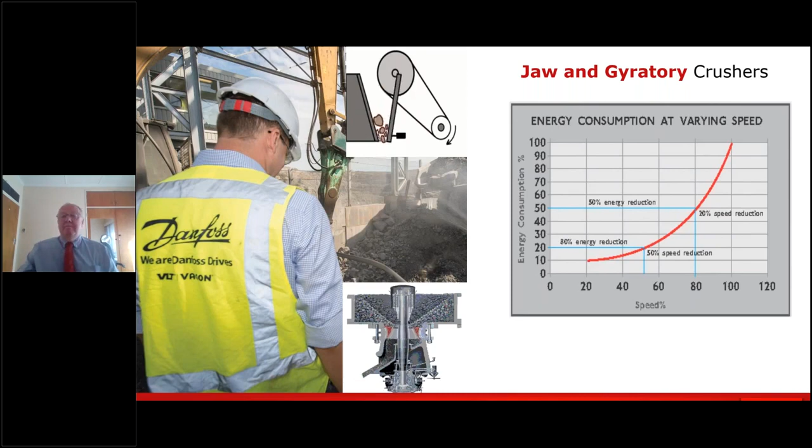Now, quite often when I'm in discussions regarding variable speed drives, I often get the comment, a drive is a drive. In other words, they are saying, well, all drives are the same. Well, that's actually not true, because the high efficiency and the resulting low power loss actually minimizes the heat load on the switch room's air conditioning and its ongoing operating costs.

So simply comparing stated efficiency ratings of variable speed drives from different manufacturers can actually be misleading, because they will all typically state that they're in the 96 to 98% range. But the factors included in those ratings can be different from one manufacturer to another.

So, for example, the Danfoss drive incorporates what we call a built-in DC link choke harmonic filter and RFI filter. And it can be installed with at least 150 meters of screened motor cable between the drive and the actual motor as a standard. And any losses in the drive associated with these filters are actually included in our stated efficiency rating of 98%.

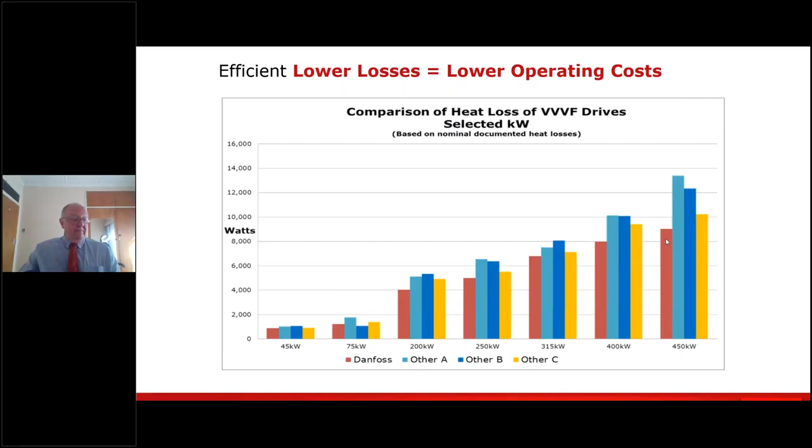So when they compared, again, you can see the differences and from which drive the least heat was emanating, compared with the others.

And what this means is, and we'll come to this on a later graph, it shows that you can actually reduce the size of the air conditioning, and if you're reducing the size of the air conditioning, well, then you're reducing the running costs of the air conditioner as well. So again, we're looking at cost savings.

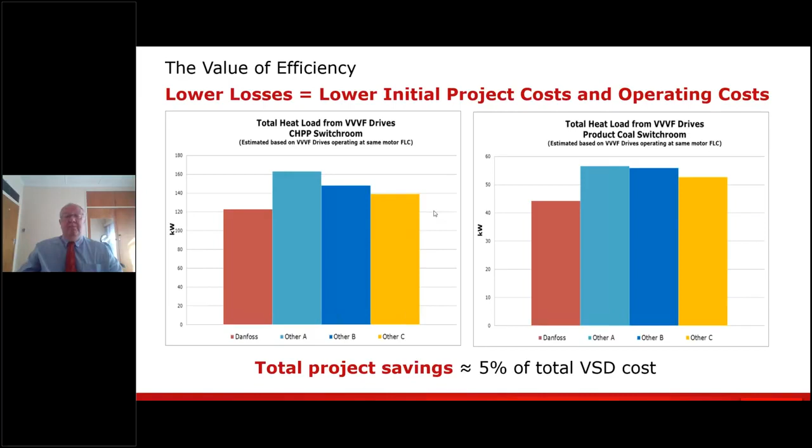Now, when the end user and the project house looked at this, they found that by using Danfoss, on average, it was a total saving of 5% of the total VSD cost. Now, we wanted to take that one step further, because we said, well, we can offer an even better solution whereby you can reduce that heat going into the actual switch room even further.

So all the Danfoss drives, 90 kilowatts and upwards, incorporate what we call a back channel cooling design. And this has separate cooling paths for the power components and the control electronics. And we have an IP54 seal between these two paths. Now, this back channel cooling removes approximately 85 to 90% of the power lost directly through the heatsink. So therefore, it's leaving only 10 to 15% of the total loss, which is then dissipated into the switch room.

Obviously, consideration has to be given to the outside air quality, but if it is suitable, using the heatsink cooling fans and appropriate mounting and ducting, the filtered external air at temperatures of up to 50 degrees centigrade can be used to exhaust approximately 85 to 90% of the heat loss from these VSDs directly back outside the switch room. And this is done without affecting the switch room pressurization.

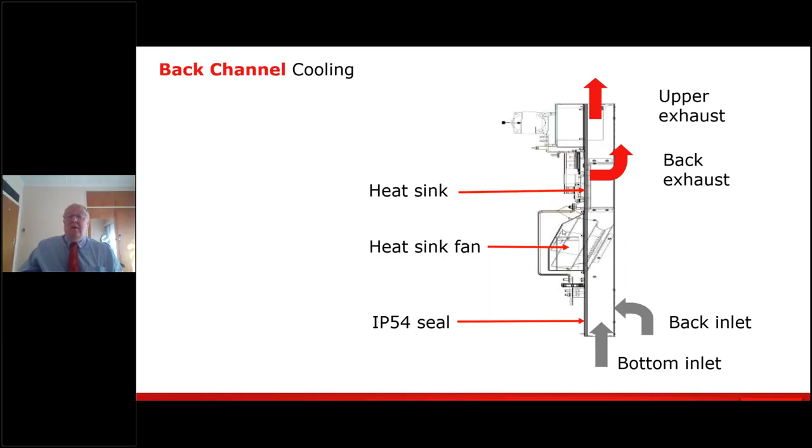And then, depending on which units they were going to use, that meant they had an operating cost saving of between $65,000 to $90,000 per annum. So quite a substantial saving, and we actually won this project by giving them this value proposition.

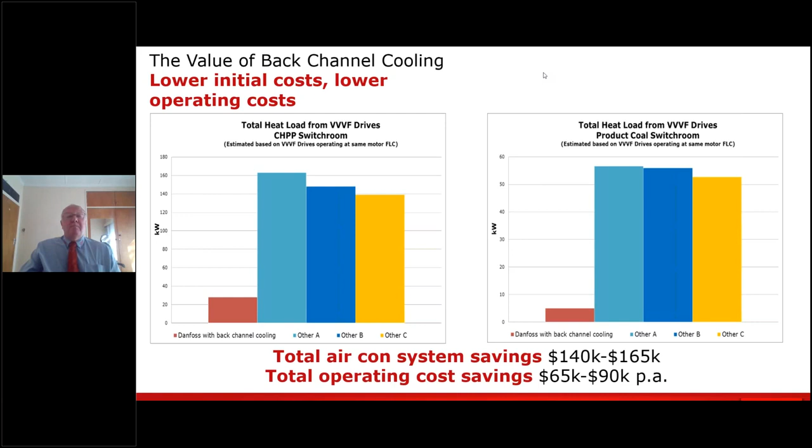Now, if we take a look at what we call the footprint, the size of the drive: electrical equipment on mines is usually installed in areas known as switch rooms, control rooms. Some call them substations, others call them e-houses. Now, these switch rooms are very often constructed from normal shipping containers, 20-foot, 40-foot shipping containers.

These are quite often used when mines are in hard to reach remote areas, because it's easy to load them onto the back of a truck, load them onto a ship if necessary, sail them up the coast, offload them, put them on the back of a truck, and then take them to site.

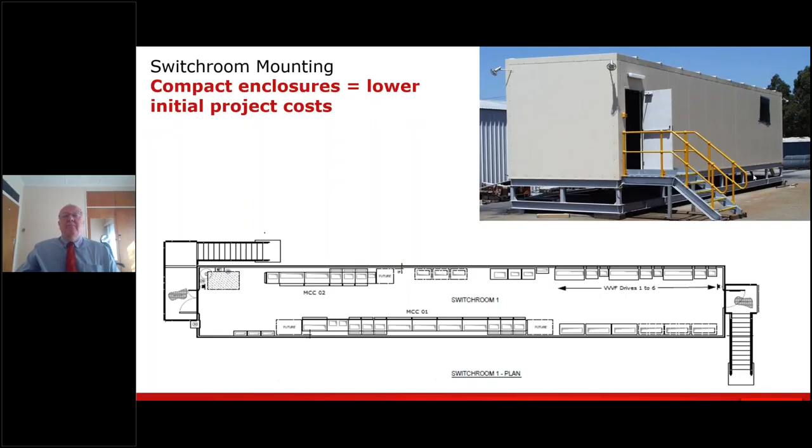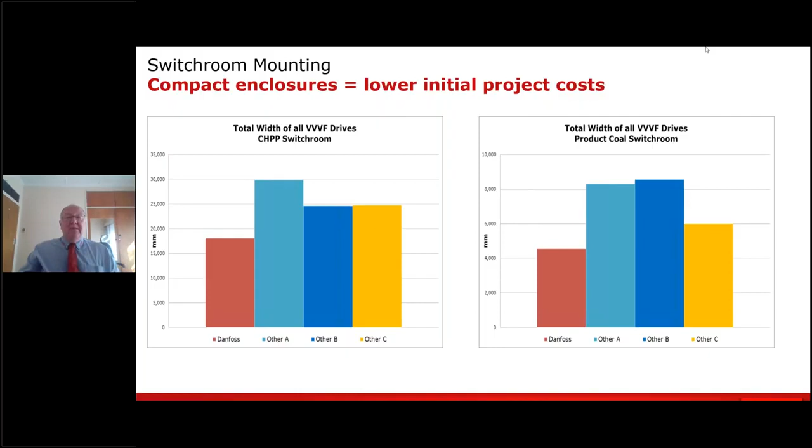Right, Laura, I'd like to show a short video now. So I'm going to hand back to Laura because it will play better and you'll be able to hear the sound better, which basically is a short video that shows how this jigsaw all fits together.

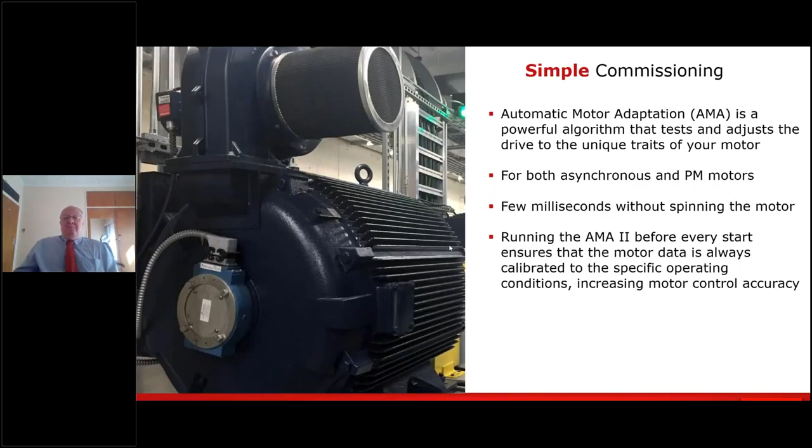Now, certain AC drives are designed for exactly the needs of mining and minerals processing plants. They have to cope with very extreme conditions, as we said earlier. Heavy loading, controlling equipment that's usually quite a long distance away. And it doesn't matter how well the plant has been designed, there's always a way to reduce these costs even further. And AC drives are very often used for just that purpose. And what does it do? Well, it extends the equipment lifetime, it optimizes the processes, it reduces maintenance, and it saves energy costs.

Now, the mining and minerals industry presents some of the most challenging environments for production that I know, and the mine sites and mineral processing facilities and the associated stockyards, ports facilities, they're very often of a large scale and in remote locations.

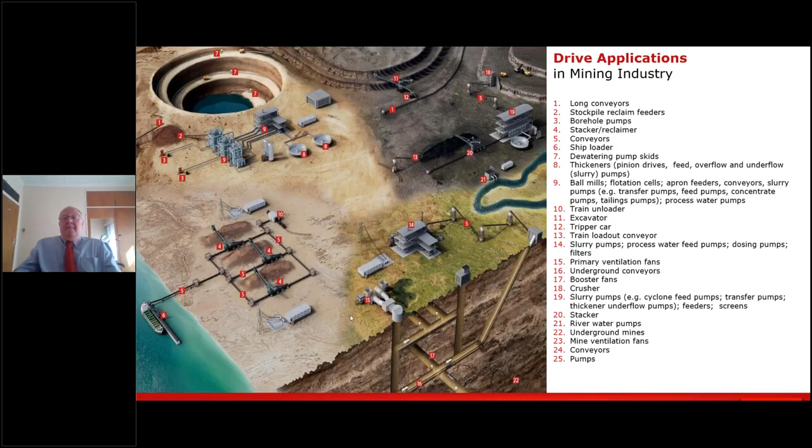Now, in 2015, Danfoss acquired another drive manufacturer based in Finland called Vacon. And what that means is that when we combine the Danfoss product range and the Vacon product range, so in other words, we combine the product portfolio, it means we can address all low voltage variable speed drive application needs in the mining and minerals industry.

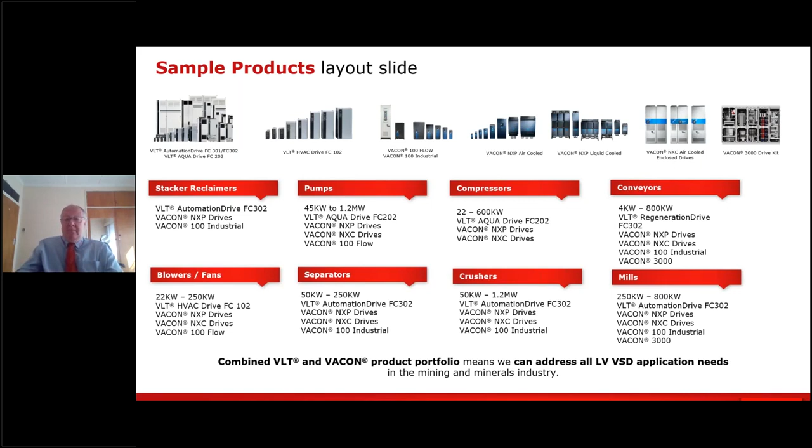So the key takeaways: well, capital expenditure savings. Yes, because of the size of the drive, the footprint of the drive, we can reduce the size of the switch room. We can reduce the capital expenditure on the air conditioning units. And obviously on the drive itself, because the smaller the drive, the lower the cost.

Operating expenditure: well, with a variable speed drive controlling a motor, it reduces the energy costs from the motor. We've already spoken about the air conditioning units. The smaller the air conditioning units, the lower the running costs. And also by using the automatic motor adaptation, the AMA, the running costs is also a saving.

And what does that leave us with? Well, it means the industry will be saving energy now and into the future. And remember, that is year after year after year.